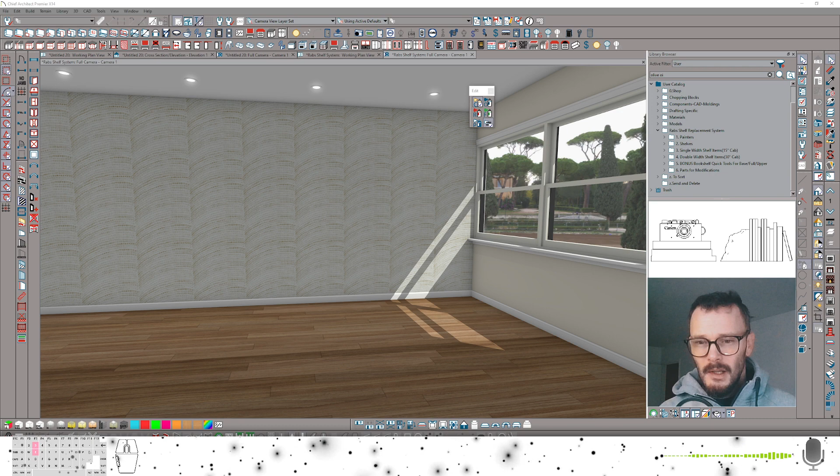So this is a shelf system, and it's built on the cabinet tools, most powerful tools in this software. So let's take a look. It's going to take a little while to get through this. This is built on a system of either 30-inch cabinets or 15-inch cabinets. So I'm going to show you what I mean. We'll get into Chief, and I'm going to drop in here a wall cabinet.

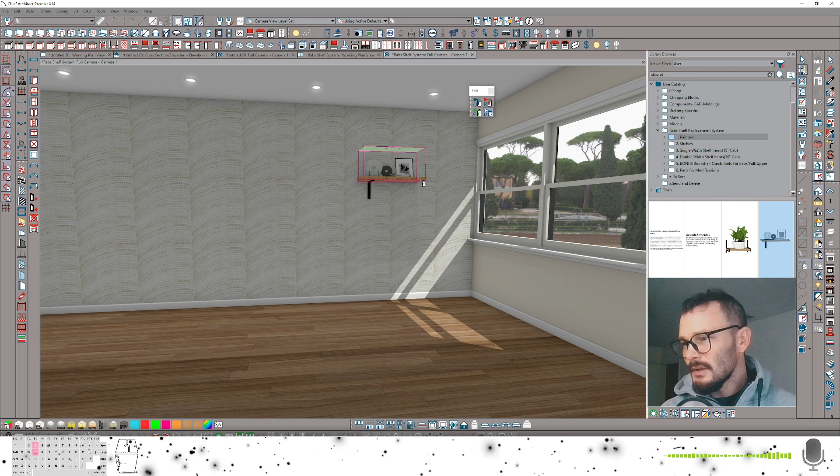And so within the folder you receive, there's numbered folders, and the first numbered folder is called painters, and these are just style palettes. This tool is meant to spray this cabinet and immediately turn it into a 30-inch wide cabinet with a particular setup here. And let's just open this up and take a look at what it's made of. This is a cabinet with 0-inch left and right sides and a 0-inch back face as well.

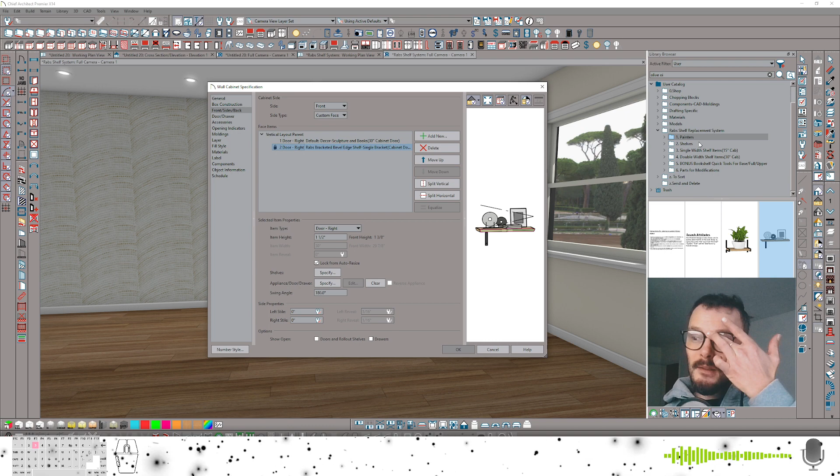And then what we have is two doors. The lower door, as you can see here, it's only 1.5 inches. That represents the shelf itself, but it's a door, which means all of these symbols are in fact doors. Now the shelf system itself only works right now with a 12-inch depth shelf, but you can of course fake it with any number of different items or stretch the shelves I've included to the size that you need and reconvert it to a door in the likeness of the symbol class that I have. So you can open up these items in the symbol class, take a look at how I've built them, and build your own stuff if you'd like to.

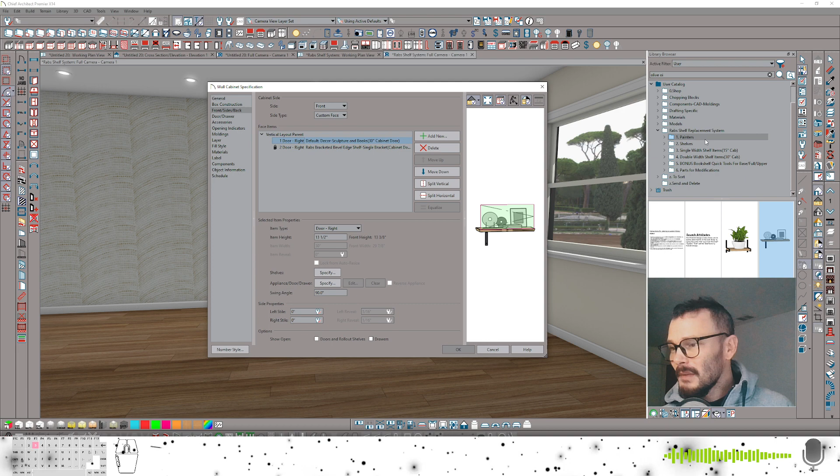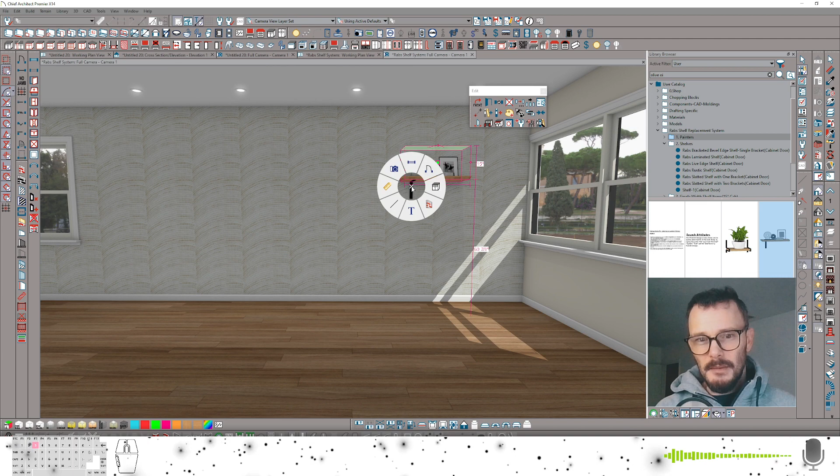That's just a note. Now, the next part of this is we've got a door here. It's based on a 15-inch overall height. Okay, so all of the items in my shelf system are 15 inches. Now that we've kind of covered that, what we can do is do our hot swap method from our library. So in the number 2 folder, I've got shelves. Now before I even do this, I'm going to actually span this cabinet out a couple different times. I'm going to do a multiple copy here at a 30-inch interval.

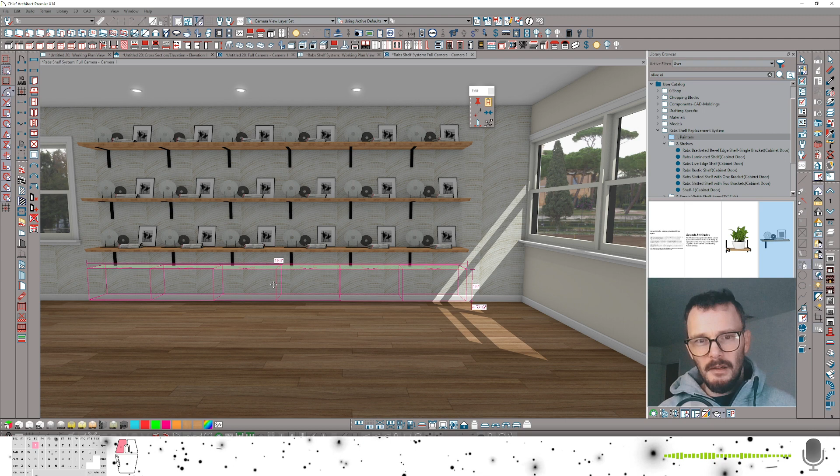And then I'll select all these. I'm going to move them up. And then we're going to make another couple rows here. So put one almost on the ground. That way we can see all the different shelves that I have available in this. Now you can see here, this has only a one-side bracket. The point of that is that you can flip this shelf if you want to and show that we have a bracket on left and right side.

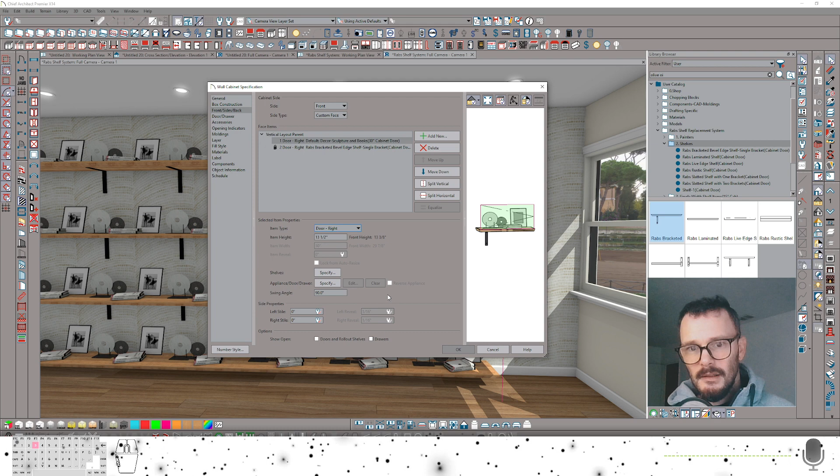Now notice that the decor actually flipped as well. Another way you can do that is actually go in here and change this from a door left to a door right and vice versa. Very easy. There you go. So I have a one-side bracket. I also have a double-side bracket in case you just want a single shelf unit. Simple enough.

I've got a laminated shelf. This is just a typical face frame shelf. It's a 3/4-inch shelf with a 1.5 inch face frame. 1.5 inch rail, if you will. I've got a live edge shelf. Actually, I'm going to paint the live edge on the bottom here. And you can see this is just replacing from the library in the component level. Notice that we've got C checked for the component library object painter component mode. Okay.

I've got a rustic shelf. This one's kind of an interesting one. We can paint this one in too.

And then one of my favorites, I have a bracketed slatted shelf. I do leave a couple components in this kit in case you want to make your own setup on a shelf, totally up to you. I have the double-sided slatted shelf for this end one here.

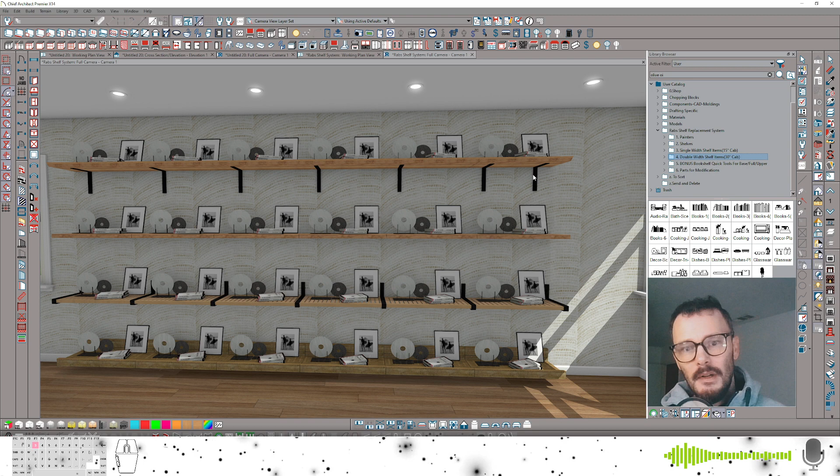Now let's take a look at some of the decor that I've included in the 30-inch cabinet system. Now these are all 30-inch cabinets. I've got 15-inch cabinets and 30-inch cabinets, so let's just paint these out. They're organized by categories, so the first category being audio, and there's only one system in this.

This has got my SX recreation of a receiver. Let me paint it up here at the top here. Maybe it looks a little nicer up there.

Got a bath system, and you can see with this particular shelf, there's going to be some items that don't work very well with it, so keep that in mind.

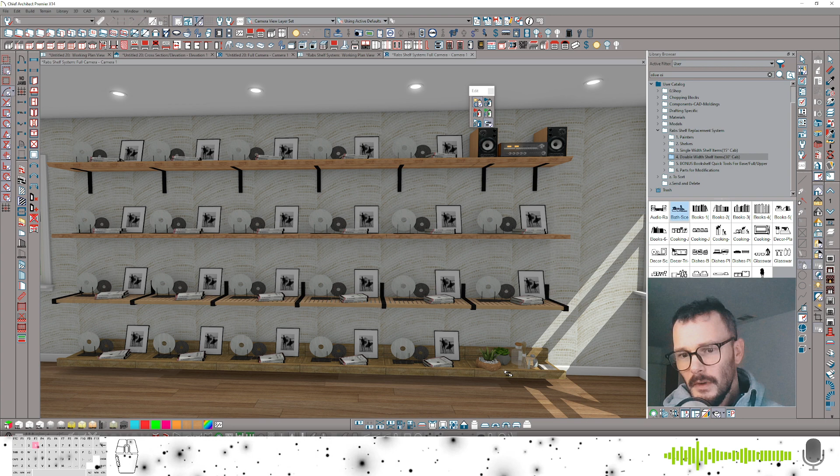Books are going to work well with this. I've got plenty of book symbols in here. Some of these book symbols have book ends in them. That's nice for just kind of capping the end of a run of books.

Plenty of cooking items for your kitchen. And I also have dishware.

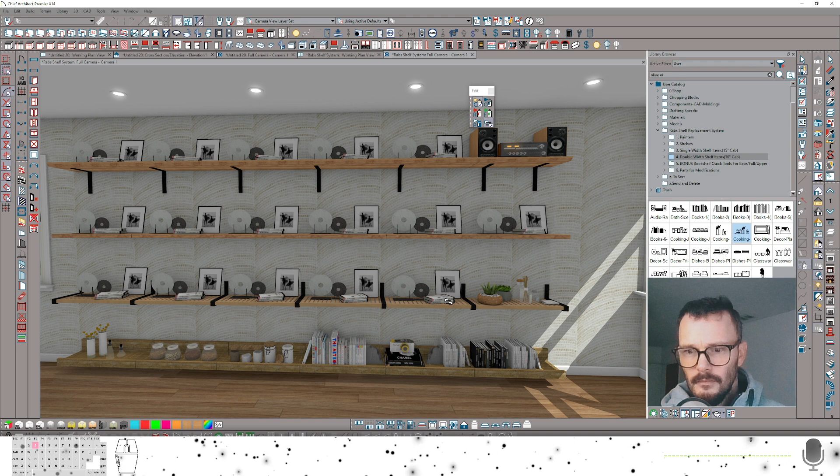Oh, that's that same one. There we go.

You can see just how quickly we can change out and build a full system based on this.

Custom modeled towels, tried to make them low poly count and ultra realistic. My custom baskets there. And finally a plant.

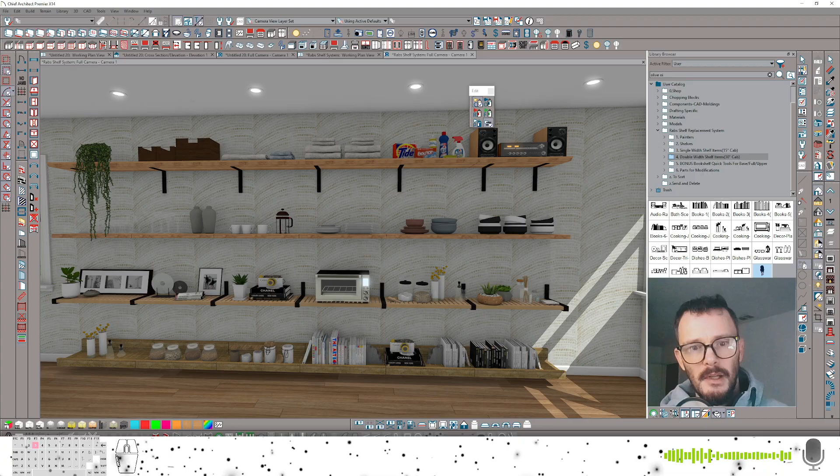Now let's take a look at what this looks like in PBR. You can see here, this is overall a very quality kit, and we did that lightning fast.

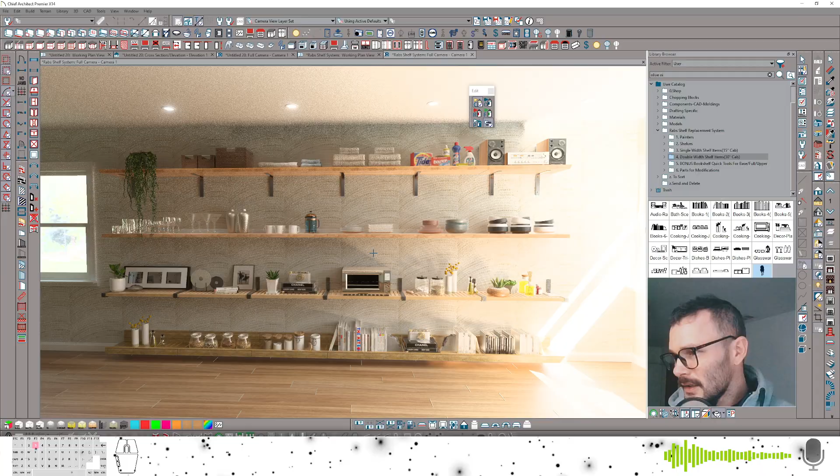So you can come up with a shelf system with this system very, very quickly and be happy with the end results. Now I'm going to delete all this, and we'll get into a 15-inch cabinet assembly and see what I've got there.

Look how good those towels look up there. Isn't that fantastic? There's nothing like that in the Chief Architect library. So, I mean, this kit really stands out.

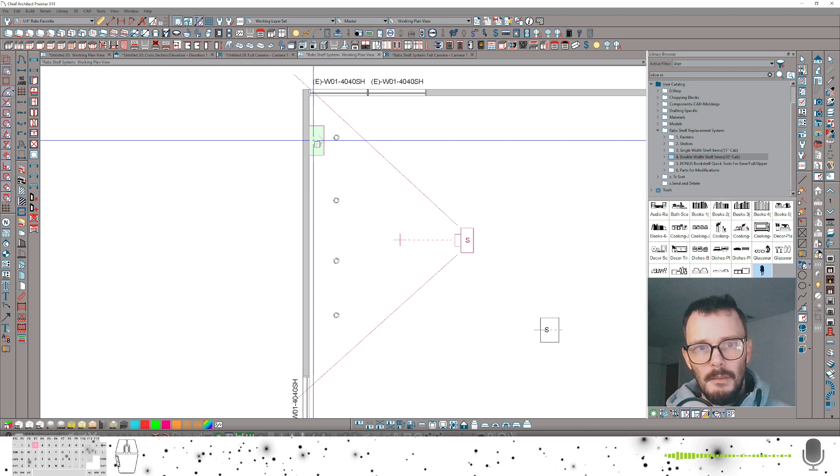And get into plan view, delete all this, and we'll end up throwing in a new wall cabinet here. We'll get into our painters. We're going to paint our 15-inch shelf here.

15-inch shelves, I don't have quite as many shelves in the 15-inch system, but the point of the 15-inch system is that you can add a couple of them together if you'd like and create your own combinations.

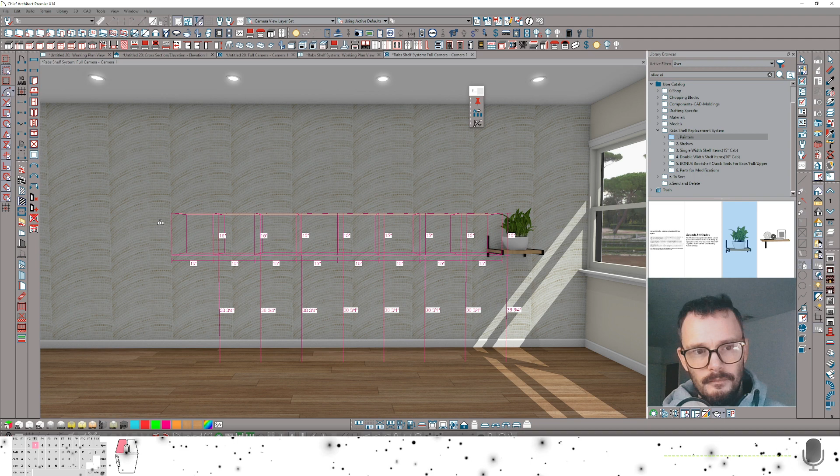So I've got that same SX receiver there. That's a custom modeled receiver I made.

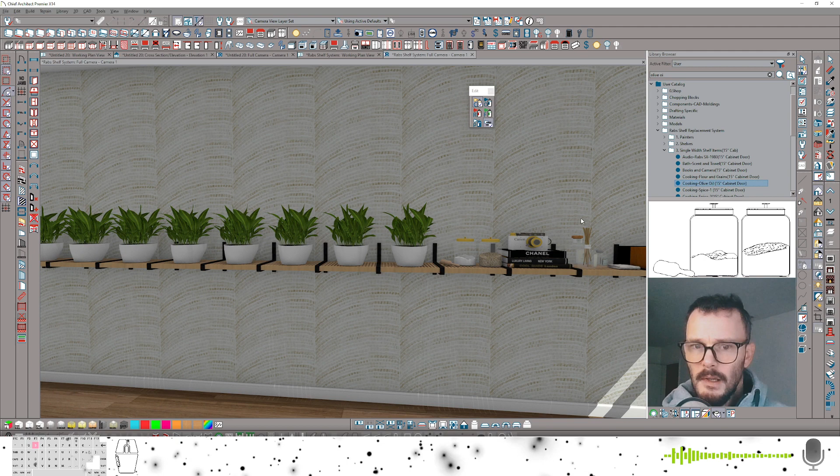Some bathroom shelf decor. Some more cooking items. These are meant for creating spice racks behind your range, a couple of those.

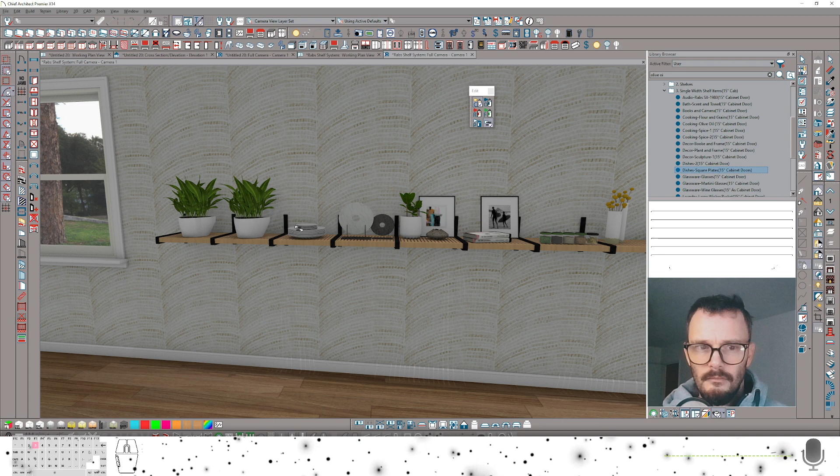Obviously some more dishes and glassware. Let's see if we can't just copy these up or down.

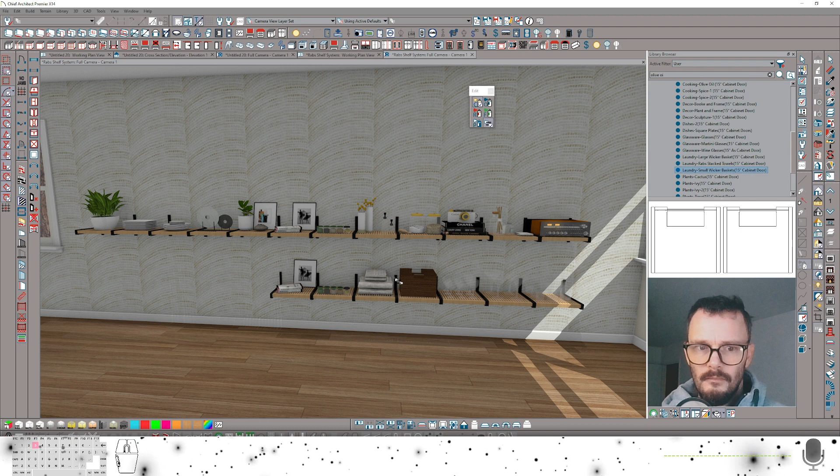Some hanging ivy. And there we go. And let's take a look at this in PBR.

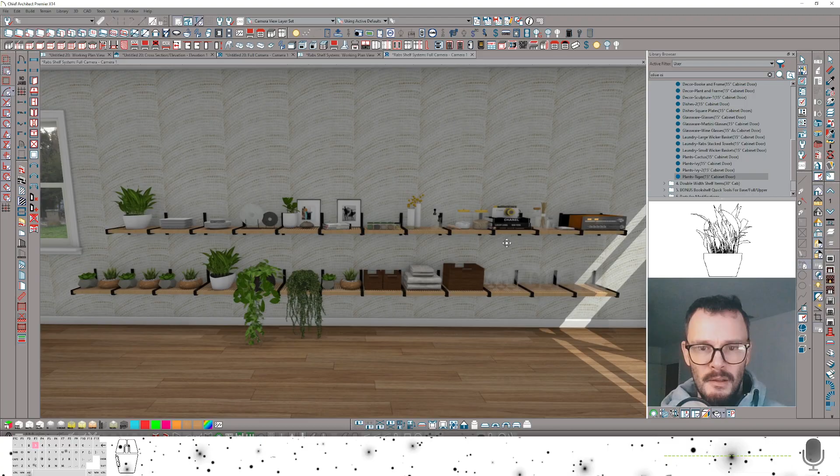And just to revisit this, we can of course change these shelves if we want to.

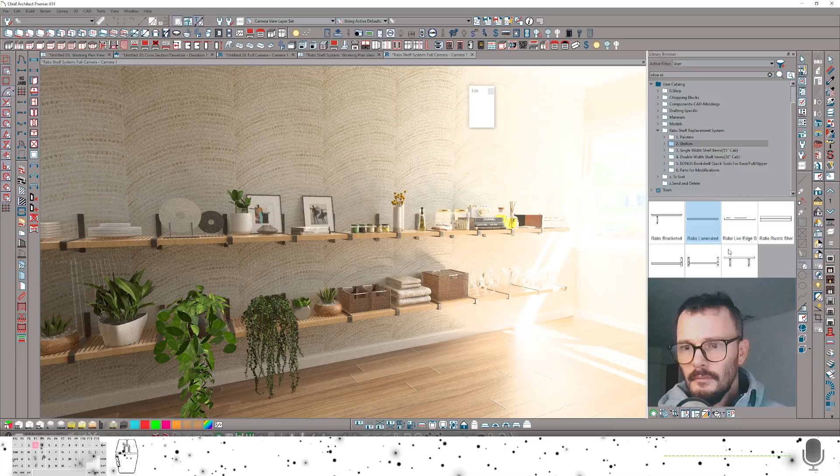Isn't that clever? All right, now let's take a look at another use for this kit, because you can put together quite a few things with this particular kit.

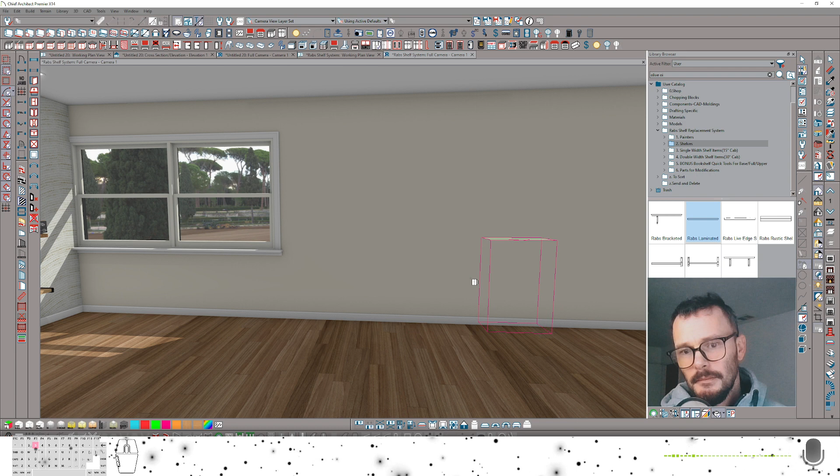I'm going to place a full height cabinet here. I'm going to make it 30 inches because I'm going to go over a couple things that you might run into, but this is still a dynamic system even with a full height cabinet.

So I'm going to take this upper door, I'm going to split it horizontally. I'm going to make this section be 15 inches. And then this lower section, I actually want to change this to be 30 inches, which is going to stretch that upper section.

Now I can use the component mode to hot swap out this segment. But before I do that, I want to split this vertically because we have full overlaid doors. My systems are built on cabinet doors, which means they're going to be inset, which means they overlay in the case of a full overlaid door cabinet. So instead of it being inset, if you want an inset cabinet, it's not a problem. If you want an overlay cabinet, we're going to have to do a couple things.

I'm going to split this vertically, and split this vertically again. And I'm going to make this an opening, setting it to item width of 1 inch. The other, I'm going to make an opening as well, again item width 1 inch. I don't need these separations, so I can delete them.

And I can move this opening to the right. That leaves me that center door section. Now there's one more thing I need to do here. I'm going to add in an opening, and make it as small as I can. If you type in 1/32, it's just going to make it 1/16.

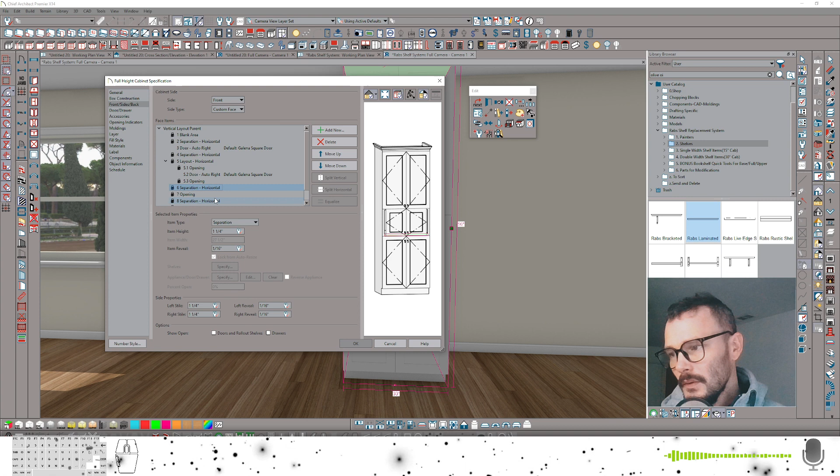Okay, and that makes a little separation between the separation itself, because otherwise your door is going to overlay on the bottom side here, which means my shelf systems are going to dive down into the platform that's created there. So we've got a separation, and this little opening needs to move up above that separation. And that's it—we've got a little tiny 1/16 opening above our separation, and openings on either side of the door.

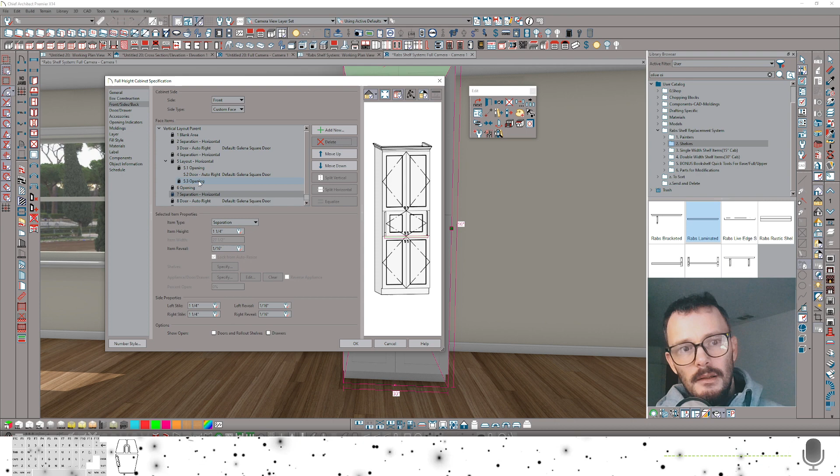Now this system works. So I'm going to get into my double width shelf items again, be in the component mode, and look what happens. One last detail we need to do: we need to make sure that we're specifying that this is not an auto right door, that it's a door right or door left. There we go.

Now this system works. You're going to notice one more goofy thing—we see a handle here. There's one quick, easy way to change that. We need to go in and specify appliance door drawer, and in the subsequent menu, we're going to make sure that our door handle is set to none.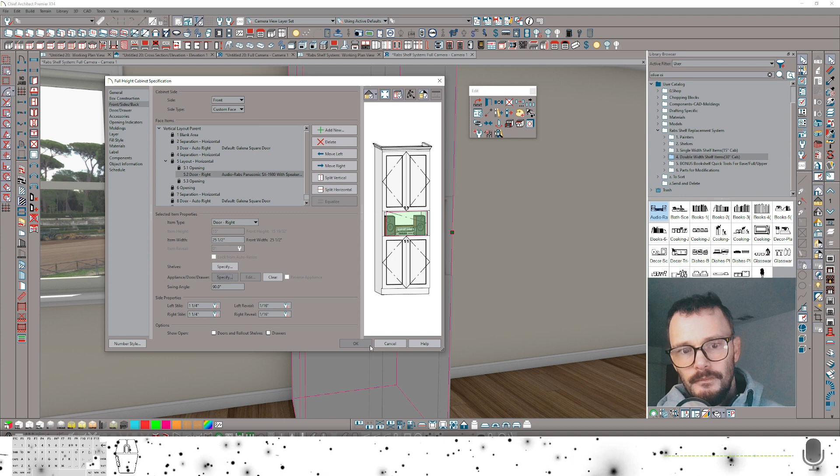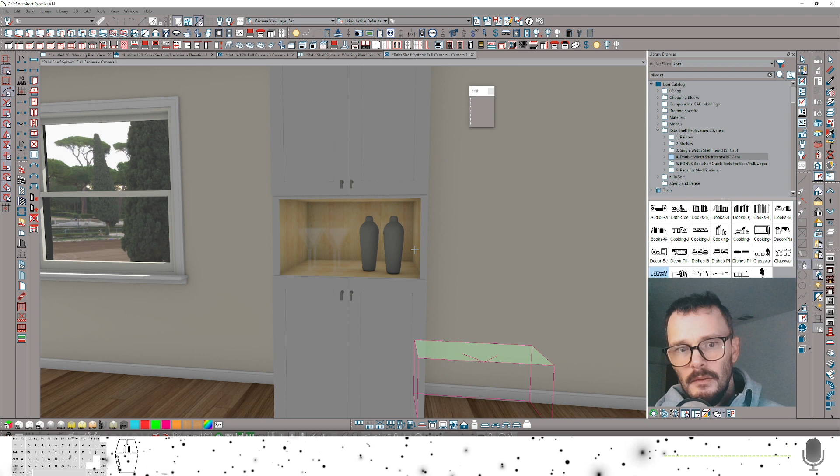Now finally we can use our system to quickly just change out items in this section. Those look like they were floating, but it's just because it's a glass texture. So again, pretty quickly we can have a cabinet with decor in it. This is a nice way to build out full laundry systems, or laundry cabinets, I should say.

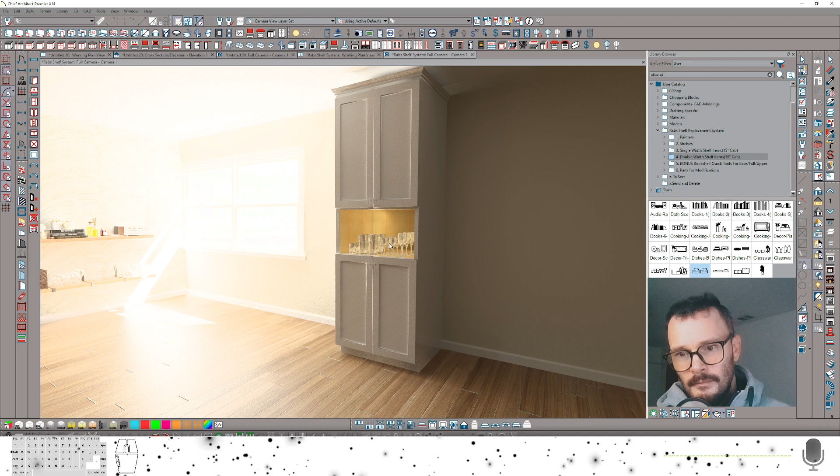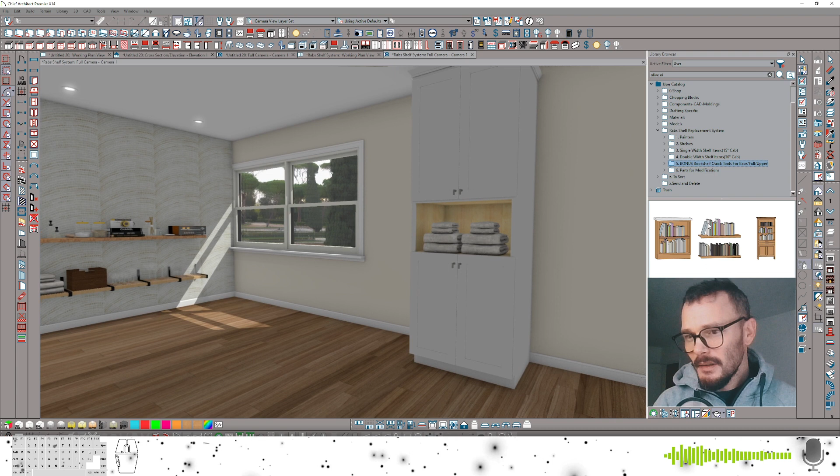So that's it, that's kind of the full breakdown and run through of this. I've got some bonus items in here. This is also included in my kitchen quick tools, but this particular sprayer makes it so that you can paint any cabinet, any type of cabinet, and immediately change it to some kind of a bookshelf. So be it a base cabinet or an upper cabinet, we can use this tool to make a bookshelf. So that's included in this kit.